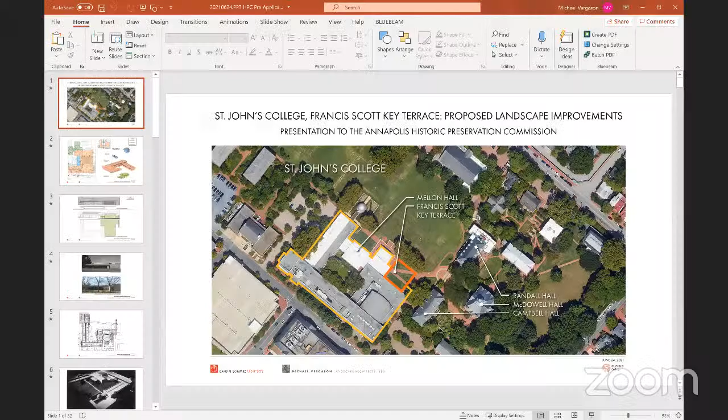Now, I may need to start with instructions on how I can share my screen. Can I do that? Sure, there should be a green button at the bottom, and it should let you select a window. Are you seeing a plan of the area in question at St. John's? Sure, thank you. Great, okay.

So, I am Michael Vergason, delighted to be here, working with Annette Griffin on this project. I am going to go through this proposal quite quickly, succinctly as I can. Don't hesitate to stop me with questions or concerns at any moment, but I'll try to move through it fairly quickly, and certainly we can go back and discuss it at your pleasure and at your length.

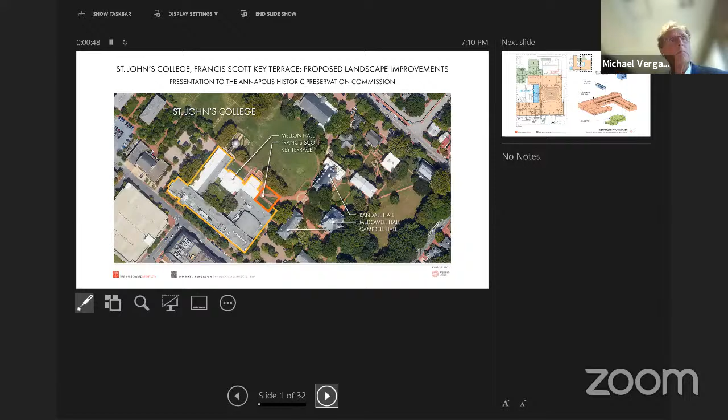The focus of this presentation is in the orange box, and that is this Francis Scott Key Terrace. I'm going to share some drawings you are familiar with already through Dean's office and presentations that have preceded ours, but I think they're awfully good in terms of describing a fairly complex accretion of buildings over a long period of time, but quite an extraordinary collection, I think.

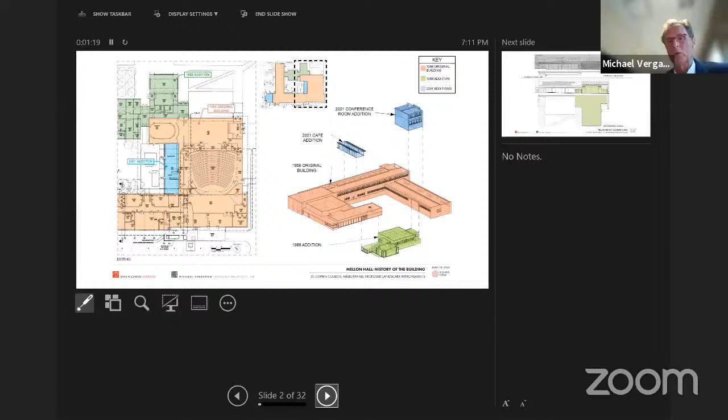As you remember, that includes the 1956 original building, as well as the '88 addition of the gallery and the 2001 cafe and conference pieces that fit together into quite a complex puzzle with, I think, quite an extraordinary beginning. You remember probably these drawings as well, elevation and plan from Neutra's original drawings from 1956. I'd point out a couple of things here: the stairs that never got built, as well as simply the beauty of the brick panel that defines that piece.

And then in plan here, the stairs that you see in section right there. Below it, current conditions with the addition of the '88 gallery, and the conditions again in plan, and then in elevation with the gallery outlined and delineated in green there.

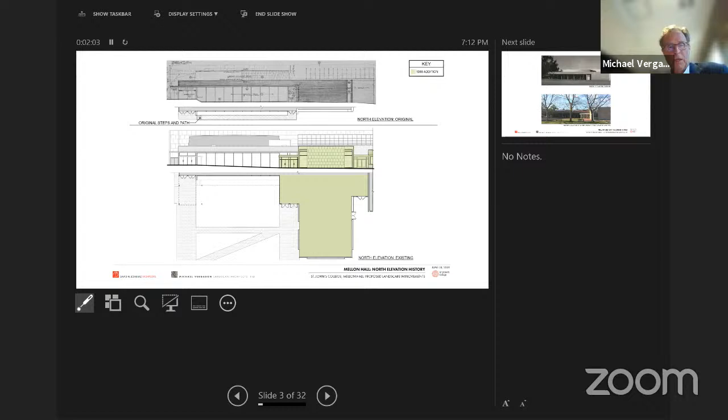Some beautiful juxtapositions of plan: the original soon after construction, with the panel that defines the window wall of the lobby from '56, '57, and then current today, as you see it, with both the allée in front of it and the '88 addition of the gallery.

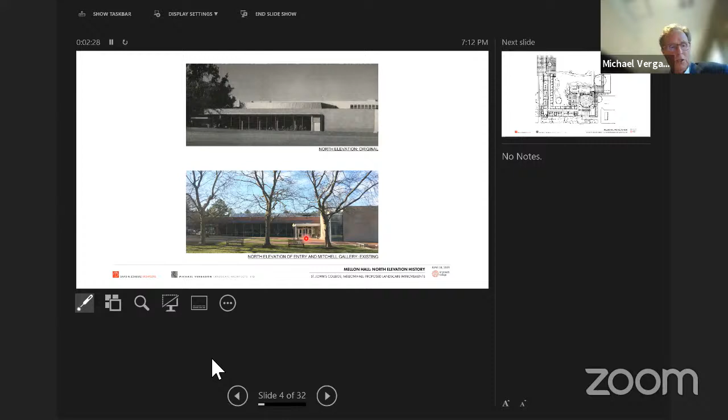I think quite an extraordinarily beautiful plan in terms of architecture, quite close to what was realized in the original plan, and with some thinking about outside space as well. I'd point out three of the pieces that fit together in this Nolli plan.

To the northeast of the main entry, a sizable gathering area. The outside area associated with the auditorium itself to the west of it, and then a fairly large idea about a large area of paving to the west of the observatory. The building is quite well worked out and very close, as I said, to what was realized.

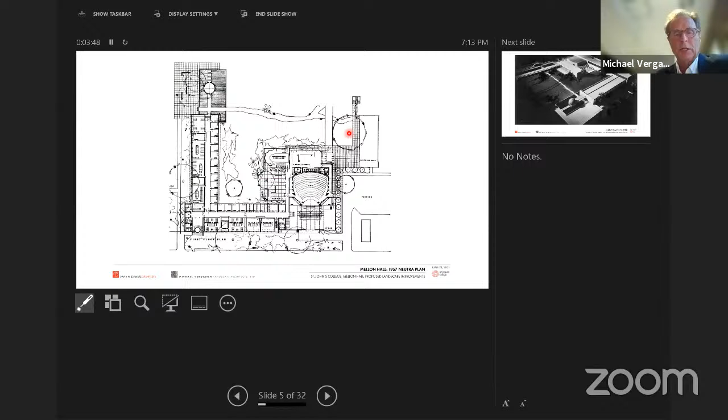I think it's interesting too to see, though, as opposed to the clarity and kind of precision of the plan and some of those outside spaces, quite soft in terms of its thinking about landscape. I will point out one tree that we believe predates that plan, a great London plane tree, a twin trunk London plane tree that is an important part of the composition and part of our concern to protect the root zone of that existing tree. It's a beautiful one. But then also the lack of clarity and confidence in the pathway system that's illustrated there.

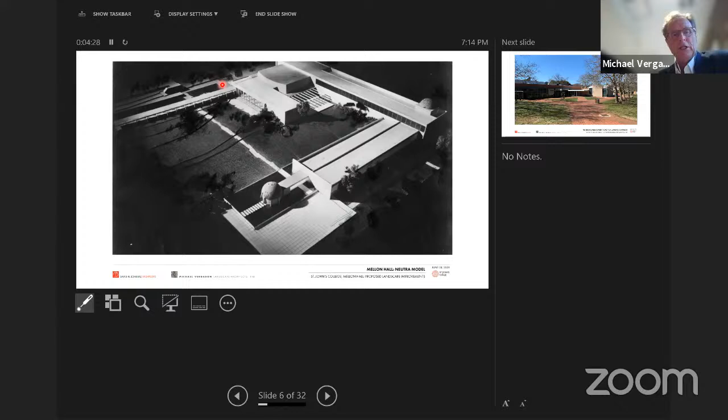All kind of important pieces of, I think, a very beautiful plan that represents quite an extraordinary example of mid-century architecture for its period and even more so for its context. I love the model as well, and you can see some of the same outdoor spaces I just mentioned, not too well to the east of the northeast entry, but quite clearly with the cafe terrace and the terrace to the west of the planetarium.

But what I think is interesting as well, that didn't show up in those plans, is what clearly is the expectation of some kind of paved area directly outside of the window wall of the lobby. And that's very much, of course, what we're focused on tonight.

Interesting too to note— hear anything? I'm sorry, I couldn't hear anything you said for the last few minutes. Really? Well, we can hear you and I can hear him, no problems here.

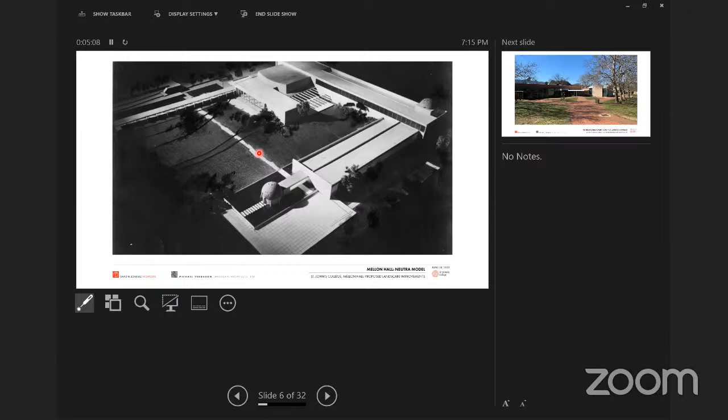Can you hear me? Can you hear me now? Fine, yes, very clearly.

Mr. Lay, would you like me to back up a little bit or keep going? I think Michael is laying out a historical perspective, following what he was saying. I just didn't want it to continue. Okay, sure, please interrupt me if that happens again.

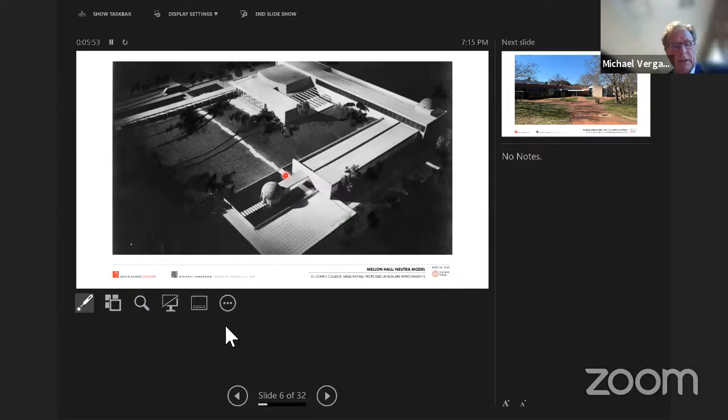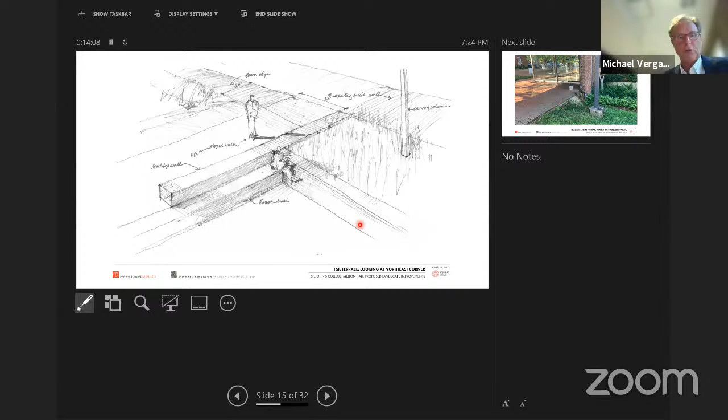Imagining it, all of that material is in brick, and that's strongly my sense of the right material. I will share with you a variety of options for pavings, but my sense is strongly that this should all be brick, which I assume matches the building, or certainly is compatible with the building at least. So that's my sense—the material is a simply detailed brick.

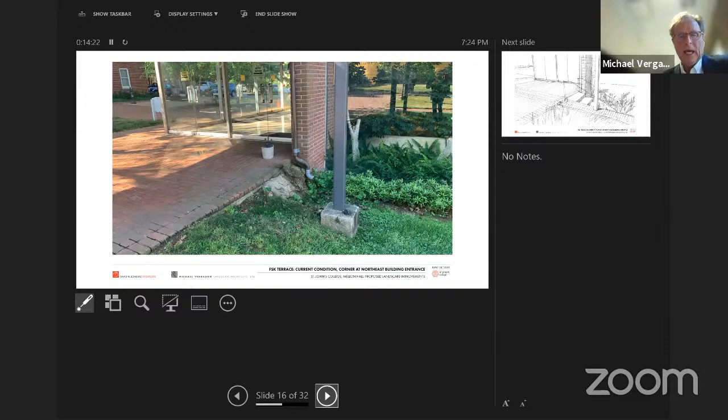Okay, I'll keep going. So if we reverse over then to this troublesome corner, you see those conditions as they exist today, and then perhaps as we imagine them—that same brick wall at the same elevation, now wrapping into that corner, a 4-foot wide slot for that set of stairs.

Now the materials for those stairs I'm a little less clear on. I could see them being cast in place concrete, I could see them being stone. I do not believe they should be brick, but happy to hear your thoughts on that as well—as they're sketched here, imagining them as stone or concrete.

I'll still insert too—the railing details will be important too, so. Yes, absolutely, they will be handrails, not guardrails as I believe it, and that does give us, I think, the kind of transparency we want out of it.

We still do show that downspout coming down there. Our intention would be to carry it over and then bring it up in a pop-up emitter into this bed, which then would get that water over here indirectly. We are looking into really getting rid of that downspout, and that would be the first choice, but we really haven't worked that routing out yet.

But what this does is allow us to get the steps in, maintain the 3-foot planting strip against the face of the building, provide a more logical and rational seat for the column of the canopy.

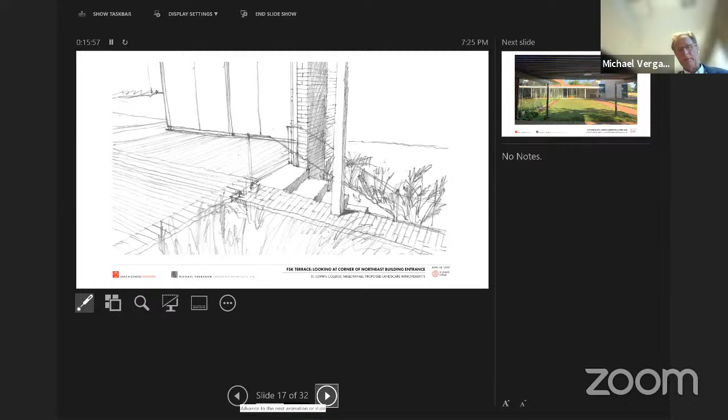And get the water out of that corner and away from the window wall. If we then go back to that photograph from under the canopy and look at how that might change—and I'll go back for a second just to make it clear—that is that existing walk I mentioned, sloping down at about 3%.

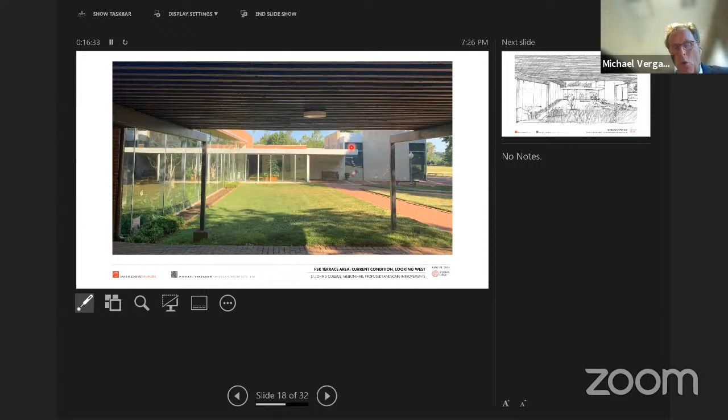It focuses on the canopied area of the entrance to the gallery. We're moving it 8 feet to the north, so that edge becomes its northern edge, and it is then aligned with the glazed corner of the gallery, but moved north. It's a little hard to see here, but what you can certainly see is the...

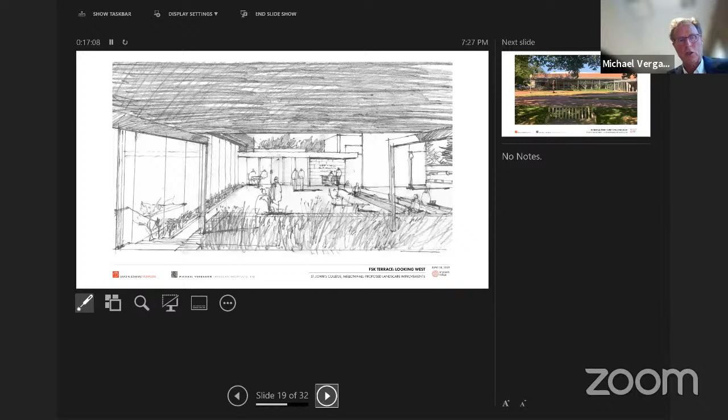planter that's elevated up to the level of the wall, the set of stairs dropping in, the column coming down on that stair, and then the two seat walls that extend out and allow the sloped walk to drop down behind them. Now with the imagery of some of the movable furniture, tables and chairs, work tables, as well as the casual seating those seat walls provide.

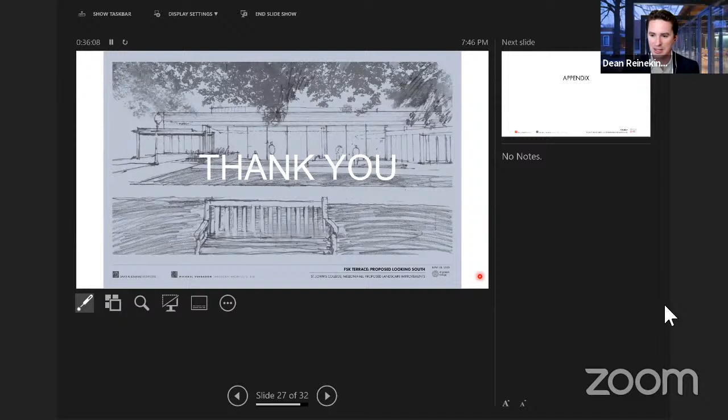So the curb, if it is part of the original construction - are you removing it and replacing it, or repairing it? I think it's at the point where it's beyond just repair, probably replacing. We're maintaining the location, as Michael mentioned, with the elevation of the plaza at that point. It needs to be at the height of the plaza, which I don't think is more than an inch or inch and a half higher than where it is - maybe a couple inches - but we have to lift it up to maintain accessibility out of the new doors.

Well, it'll be important - that's just an original feature, just like any other. It's not as significant as the plate glass windows, but the same idea. You just need to tell us you're going to replace it because it's beyond repair. Okay. Anyone else have thoughts on that item? Oh, no, not on that item.

Okay, removing the benches - I think you're exactly right. Students tend to go right over them, but they also use it as a funny little gathering area. I can validate they look like they were built by the students in the 70s. They also detract from the horizontality and overall composition of the main building that we're trying to protect and enhance. Does anyone feel they have gained historic significance?

It'll be interesting to see how you treat that. Are you just planning on leaving that open for circulation? Was that a question to me? Yes, I think it depends - I wanted to hear your reaction to it. I think if the consensus is to lose it, we would embrace that. We might also look at a way to still create a little bit of a place there, maybe a place to sit, but one that doesn't constrict the entrance and is more compatible with the clean nature of the original building. When you say a place to sit, are you thinking of a small border wall that people could sit on?

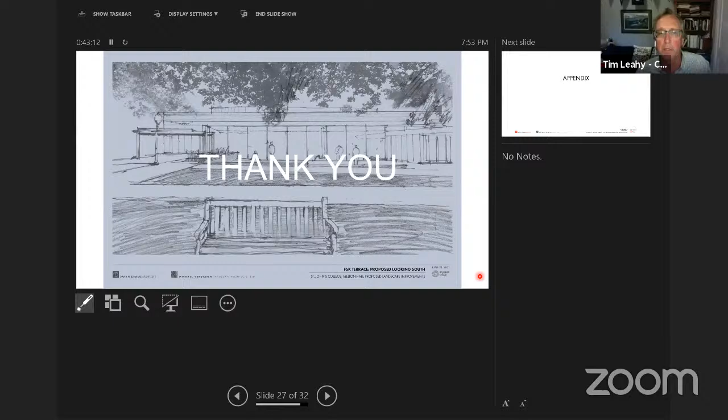I'm not trying to debate the issue, I'm just suggesting that's a concern. Yeah, I can echo that exact concern. If you look at this drawing we're looking at right now, you can see where the corner of the rain garden interrupts that corner of that such prominent window wall.

Is it possible to reduce the size of that even... over to the rail or the frame?

It just, you can see it right there, in my opinion. This is just my view. Again, our objective here from a guideline point of view is not to compete or diminish or have an adverse impact on a significant feature. So that's a bit of a concern. I don't know, just by reducing it, I think you could solve it.

I'm not proposing to put an angle in or anything, I wouldn't design that way, so is it possible, feasible for you to make that change? What's driving the size of the rain garden is the question. The size in the north-south direction is driven by the depth of the terrace.

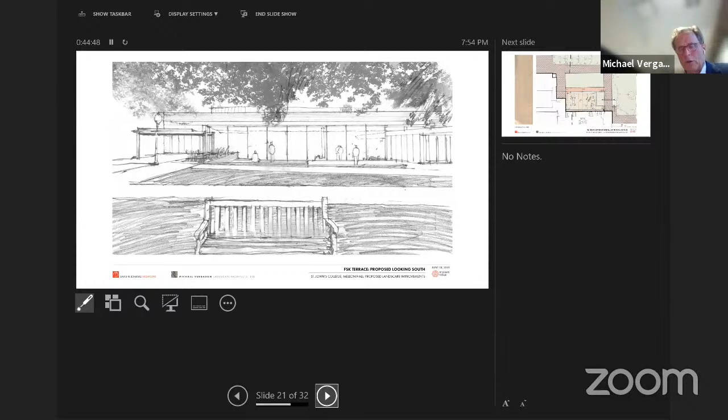Yes, but the east-west direction is driven by an 8-inch gas line. It's a major gas line, not a college-owned one. It's a municipal gas line with an easement that runs with it, and we are getting as close to it as we possibly can. Rerouting it is not possible, so unfortunately the east-west direction is driven by that very significant 8-inch gas line.

Okay, I do have a thought here, and I hesitate to say it, but at the Gulbenkian Museum in Lisbon, they have a beautiful, shallow pond with water lilies in it. It provides variation and visual interest when the lilies are blooming. Could that be a possible proposal so you would keep it shallower, less visually intrusive, but still provide the functions of both vegetative decoration and water management?

Well, I think that's quite a beautiful idea, beautiful thought. I will say we do a lot of fountains, a lot of work on colleges and universities across the country. They come at a cost, and the cost is not—

Oh, I don't mean a fountain. I just mean a shallow reflecting pool that is planted with water lilies that will only be at the surface of the water.

In this case, it's a distinction without a difference. If we had standing water in there, we would have to recirculate it, treat it, and it's got to have a sealed bottom. Now we've done them where they have all those things, plus a freeboard for rainwater, and the rainwater moves through, and it's all a good system.

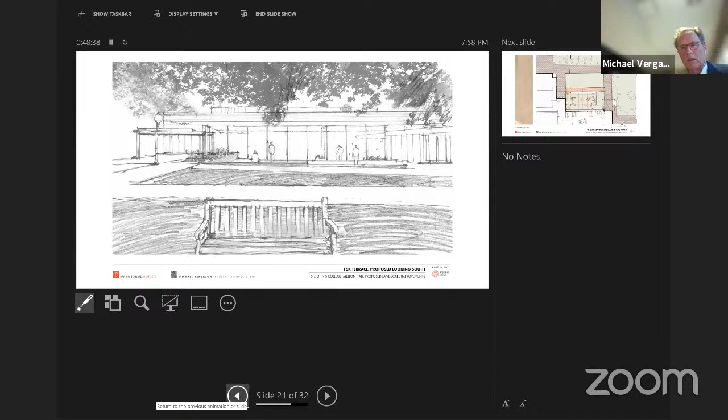I ask a question, please? Sure, Bill.

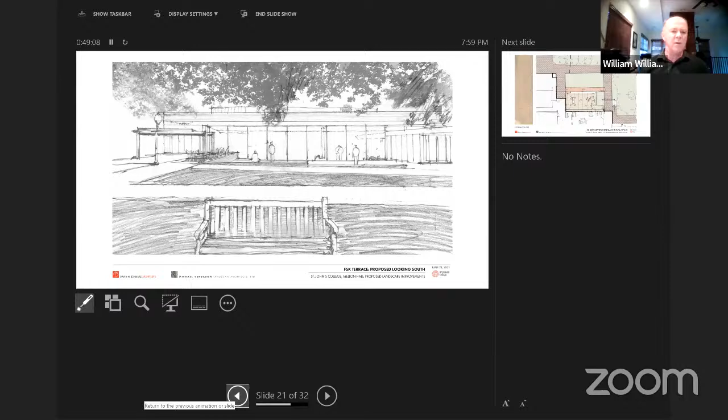The corner that's down by the glass—I believe you said you don't want to step there. My question is, we already have the wall stepping where you have the seating parallel to that glass. Why not do a step just at that corner? You could even maintain whatever stone cap you have, so you have almost a reflection of the two, or a replay.

So in the plan, it would be the lower left-hand corner there, and you drop down and come across to the stair and step back up again. By dropping that corner, you help relieve the blocking of the glass, add a little more interest to the plan perhaps, and replay what's already happening parallel to the glass along the walk.

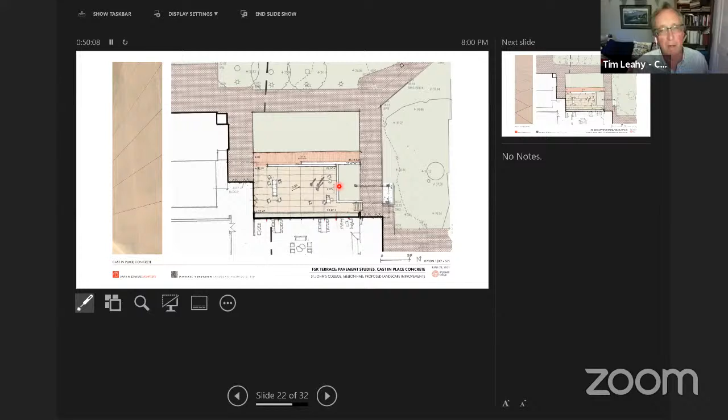Can I just interrupt real quick? I really want to coach my commissioners—I think we've explained the challenge. Right now I feel strongly that it's up to the designer to solve the design issue we've presented. So I love the concept, Bill, and I know you're an architect too, but we need to remember that. I understand. I think we've provided the feedback that the corner seems to be an issue from a guideline point of view.

Can I ask one more question? Just so everyone understands, the routing does something like this, and I think Michael has held it as close as possible to the wall. There's a large valve in the corner there—this is on the original plans. I don't know if we can designate this gas line as historic.

We're respecting it in its current siting—probably not, but I didn't know if there was any other consideration. I think what we're trying to balance here is the context of this upper piece and the creation of this new lower piece. I don't know if there's any other guideline feedback we can draw on as we try to solve this, and I understand the issue with the glass here. It's a feature that's not there now, and the pipeline is there now—so it's a prominent new feature alongside an existing pipeline. All we're really trying to say is that design feature needs more work.

Ideally we want to alleviate the closeness and proximity to that issue of the glass. Well, it's actually an elevation, you know what I mean—it's in. We've said the prominence of the glass plate wall from day one, right, as such a character-defining feature of this building. Right now, without an architectural feature there, it's uninterrupted, and now there's an interruption. So, just need to be sensitive to it, I guess.

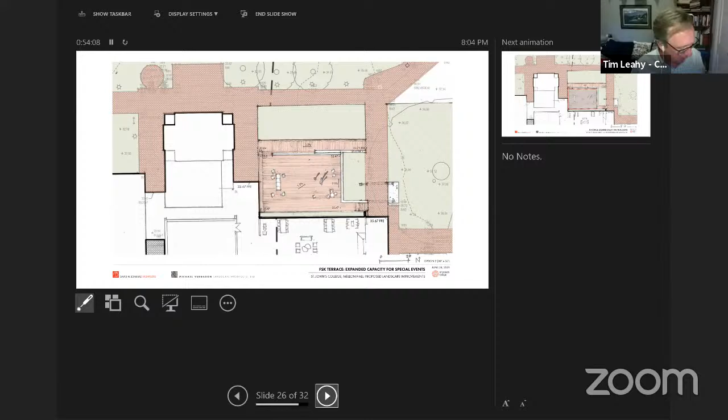Yes, I was talking about flat work specifically. It's a standard—it is the face brick dimension, the only difference is the mortar's not there. Crazily enough, we have a guideline that defines five patterns, and that's not one of them. Does anyone else have any issue with the fact that it isn't one of the five approved or recommended standards? It's a 'should,' not a 'must' statement, so if it's already being used on site there, it's already a feature that's part of the design. Exactly. Okay, all right.

I'll hold off summarizing then if no one has any other comments. I've got some notes here that when we summarize at the end, I'll summarize this aspect. But generally, I think we have given you feedback and it's mostly positive and feasible. That's where we're going to end up.

John, do you have anything else to say? I think the terrace is sympathetic, and I think it would be an interesting addition. Yeah, okay, great. All right, we can move on to the other aspect of the design. Thank you.

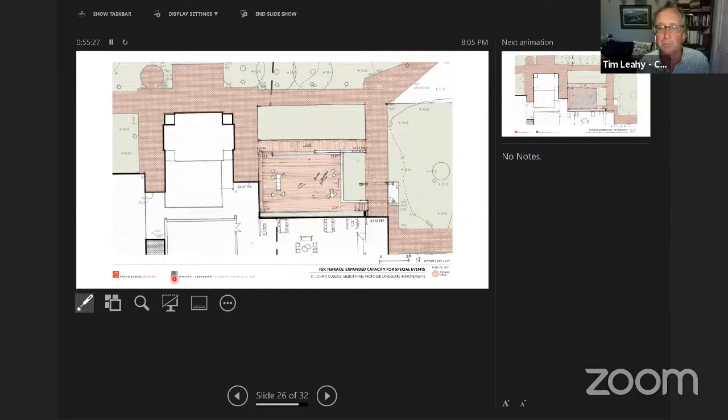Hey Michael, if you can unshare. Yeah, there you go. Doors up. So we won't go through the first 30 pages of this. Nothing's changed. Thank you. Yes.

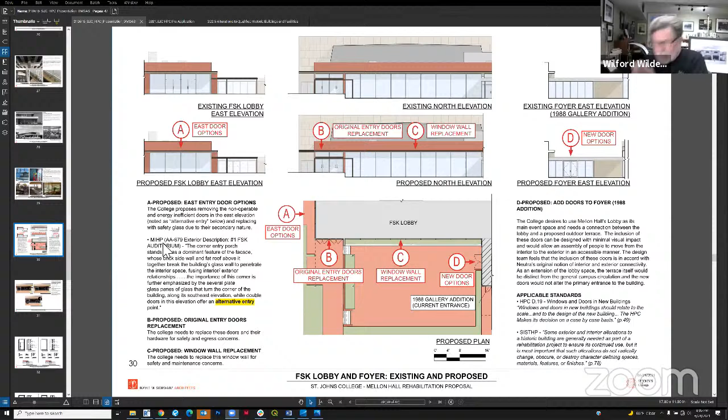And right off the bat, everyone can notice that the solar panels have been deferred possibly to the future, but they're not in this application. Correct. Okay, so we just had a few updates. We did a site walk with Roberta and John shortly before her departure, and also with MHT on site. We've also had further conversation with someone who's going to help us with the actual fabrication and design of the window walls. So that's in progress.

So that goes to a point that was raised last time about whether we could see some samples for section C, of what an insulated unit versus a non-insulated glass would look like there. Those samples are hopefully in production, and we'll be able to get those out on site, hopefully before a future pre-application, so that commissioners can walk out and see them on site in comparison for a final approval or disapproval on that. So that's the only update on this main section for the moment.

On the east doors, we wanted to address—I think we still had the etching idea on the table. Maybe last time we spoke, I think we've taken that off of the table. I think everyone just sort of said that's kind of goofy, both the college. So I think our client, as well as the commissioners, sounded not in favor of that approach.

So I think our preferred approach, and the cleanest approach, would be to probably just omit the doors. And we recognize that we could still use the same bottom profiles that are there on the doors that track across this entire glazing system. So the only thing that would be going away would be the two handles and the patch hardware that's there. The alternative to that would be to replace these doors.

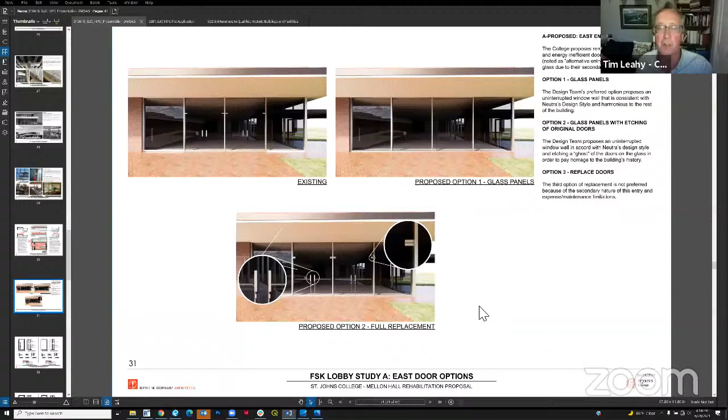So I think from a guidance point of view, we're letting you know that option 1 is feasible. Okay, thank you so much. We'll work toward that, and we'll also include some stuff on option 2 just for comparison in the final. Okay, thank you.

So I'll go back to the plan for a moment. We've addressed part A on the east doors. Part B, I think we discussed fairly well in depth, and I think there's just one question relating to that piece, which is we will have to incorporate ADA egress hardware here in some format as part of our egress component.

There is a section, and Jim, perhaps you can speak to this a little bit. Jim with Kessler Group has been digging into some of the hardware stuff, but there was something we discovered that may actually let you move away from some of that hardware.

But Jim, maybe you can...

What's going on is that there's a section in ADA that requires the face of the door be relatively flush on the side that's being activated. So what you're seeing with the panic hardware, where the bar turns down as rendered here, is not strictly ADA compliant. It projects too far from the face of the door at a level too close to the floor. They do make an alternative type of hardware which turns up and secures into the ceiling, usually in a glass wall done with a floating header that allows you to latch into the top. That's obviously not desirable here considering the existing construction.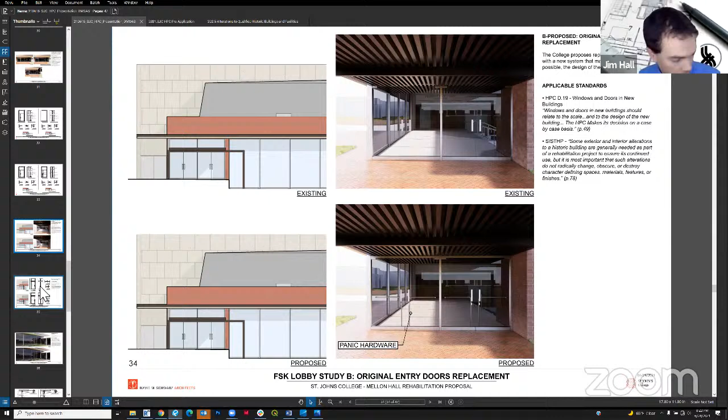Okay, I think I mentioned on the window wall replacement, we don't have any new information until we get those samples. Jim, is that correct? We don't have any further updates from our walkthrough of this center section? Not at this time.

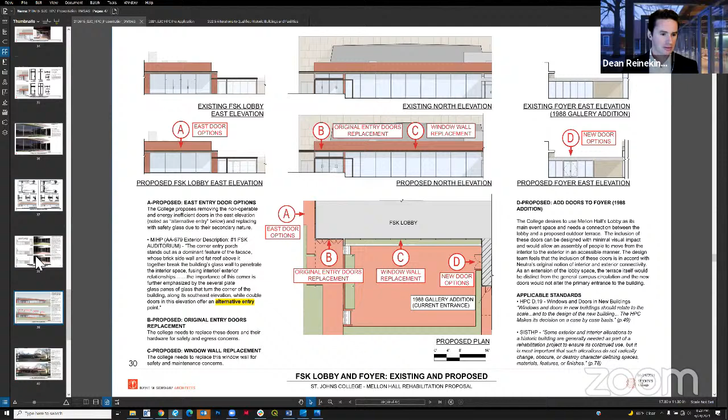And then the last issue is this new entry door onto the terrace, which now we've actually seen the terrace, so we can contemplate that a little bit. We looked on the right slide here. So in the last conversation, we had discussed utilizing the existing door proportions from the north end of the 1988 addition. The mullion spacing is basically 8 feet from mullion, 4 feet for the smaller ones and 8 feet total.

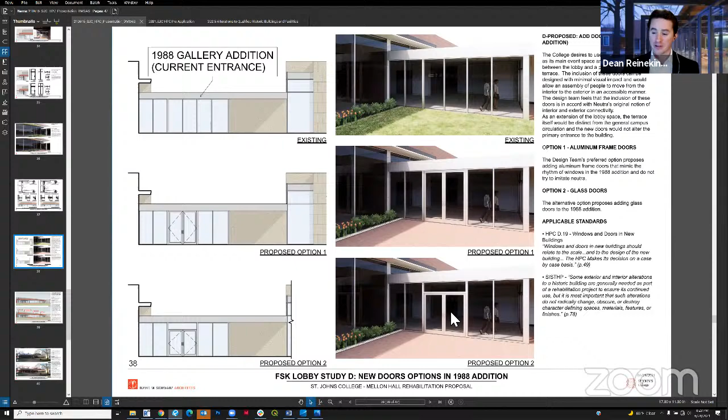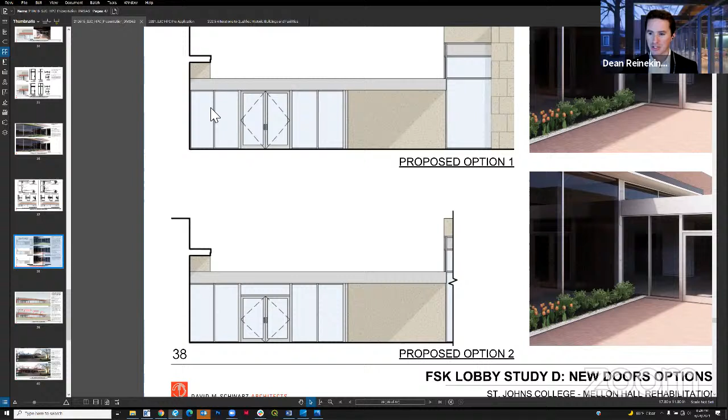So when you take that height, which on the north elevation is a 6-foot door, and you stretch it out to be an 8-foot set of doors, our feeling was that it starts to create a rather squat dimension in the elevation when you maintain the exact same heights along there. So we'd like to surface the recommendation again to go to just a full height set of doors, different than what's around the corner, but the proportion seems more in keeping with what this elevation was. We wanted to raise the issue since these just start to feel rather squat and out of character, to use a very technical term, and understand what the general feelings around that were.

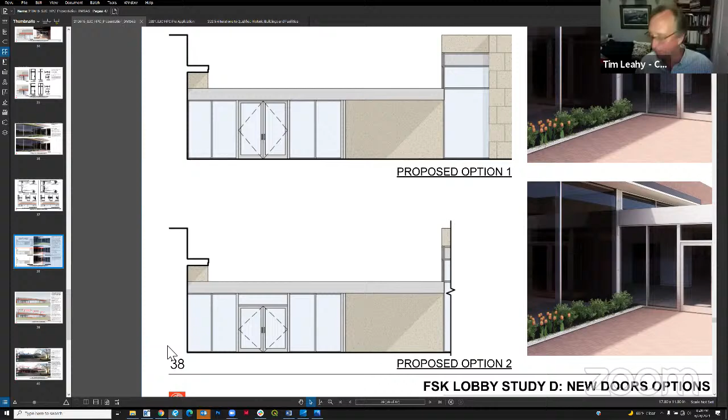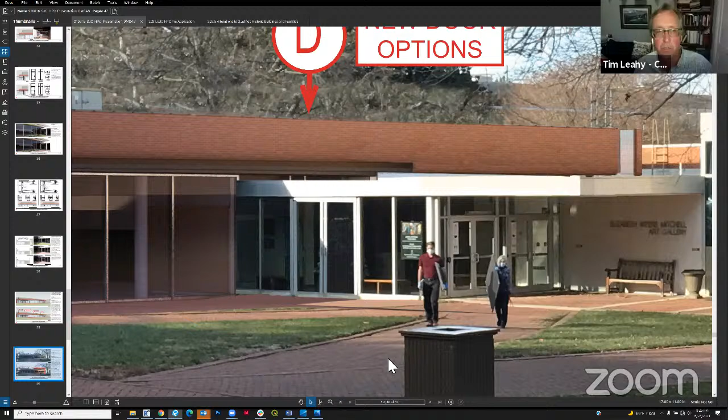Okay. Can you just do me a favor and advance two slides to slide 40? Yes, because I think that really tells the story. Certainly. Yeah, so this is the original set of doors, which again are 6 foot in total, and then these would be closer to 8. Right, and if you just zoom back a little bit, and then we can chat a bit.

Thoughts about these two alternatives? Strong preference to one. Sorry, one being the taller one or the shorter? Yeah, the taller one. The other one calls attention to itself, and I don't think that's what we want. It also, that's a good point - it does introduce a horizontal here, which doesn't exist. John, Tower, thoughts?

Option one is clearly the winner. More sympathetic. Okay, Bobby? Okay, for exactly the reasons mentioned. Kim? I agree.

Okay, I'll summarize a little bit. This is what persuaded me, this view here. On the one hand, copying the new feature underneath the canopy, which is kind of hidden in this view, compared to keeping the rhythm of also a new feature, which is more sympathetic to the plate glass original wall. I think it would create a squat look right from this angle that would call attention to itself, and that's the last thing we want to do. It should blend. And it keeps - the frame is a little wider, it looks a little thick. We can work to minimize that frame dimension as much as possible. Right, if you can keep it to the same width as the mullions, the uprights in that wall, then you solve the problem. Okay, will do.

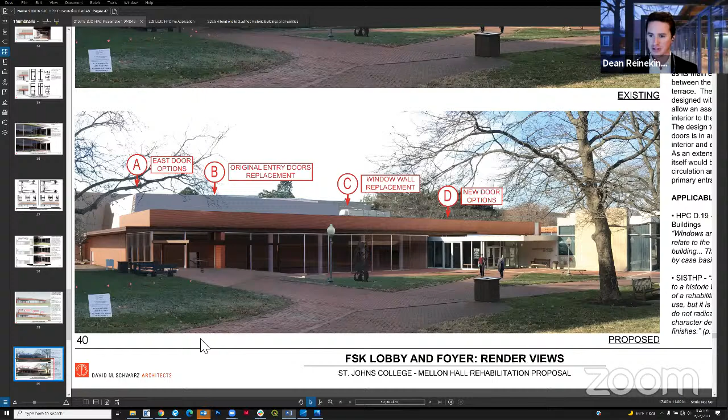Great, thank you very much. Appreciate the feedback. I think we've taken the solar panels off the table, as Tim mentioned. So I think that's the end of our comments for this evening.

Okay, any final comments before I summarize? All right.

So in summary, tonight's presentation regarding the renovations to the exterior of Mellon Hall at St. John's College had two aspects. First was a plaza and landscape features on the north facade. We believe overall the project is feasible, and this aspect is feasible and compliant with guidelines. A few aspects we discussed: the materials were discussed, and the concept of using brick in the flat surfaces is favored, as the applicant prefers. There was considerable discussion on materials on the treads, on the steps, and the actual materials on the seating walls.

That's still an open option, whether they will be completely brick or stone on brick, and that can refer to other areas nearby around the campus. There's a few to choose from, and either seemed okay with the commissioners from a guideline point of view, although at least one commissioner did favor a stone top as opposed to a brick, but we can talk that through.

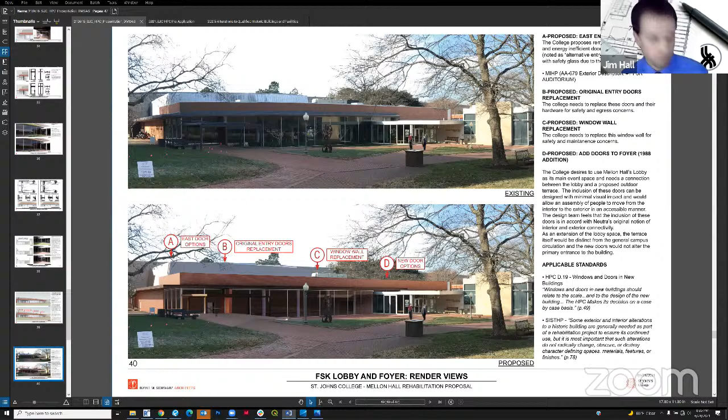Well, thank you everybody. And Michael Ferguson, I just want to say hello. I think we overlapped in Charlottesville in the architecture school.

Yep, I was class of '76. What was that? I think your microphone's messed up, Michael. Yeah, cut that out. There we go, you can unmute now if you want. Oh, sorry. That was just a personal note. We'll take off, we'll talk to you next time, Michael. Thank you, thanks everyone, all righty.

That is it for other business tonight. On administrative business, commissioners, I just have four items, actually.

First, I hope you were able to read the letter from the Environmental Commission that we received regarding living shorelines in general and the St. Mary's application in specific. If you have any thoughts, we can share them now, or I can just share my thoughts.